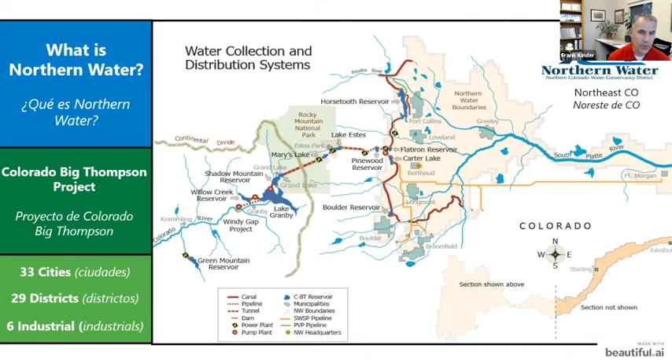In the last 3 years, we've launched a variety of services in support of what we're doing today. We have a campus here in Berthoud where you can come see wise water landscapes. We provide consultations to HOAs, businesses, and municipalities - if you're in a community that could use our consultation service, which is free of charge, we welcome you to reach out to us. We also provide irrigation audits to establish a benchmark for water use in existing landscapes. Further, we can also help with future landscapes and understand ways to maximize designs for low water use.

We have some tools available on our website under fact sheets and tools. We also provide grants to transition high water use landscapes to low water use and provide ecosystem services to support pollinators and other species. We're also helping cities plan for efficiency - there's a lot of growth in the region, and we want to be as responsible as we can with that growth to maximize water efficiency, considering the drought we're in. Training and events are one of our feature services, like our program today. We also provide an annual conservation fair, generally in the summertime - once COVID is over, we welcome you to attend. It's generally in June. Finally, we run a weather station network of 23 stations in the region where we provide details to people who are providing irrigation in the most efficient format, watering to ET or below.

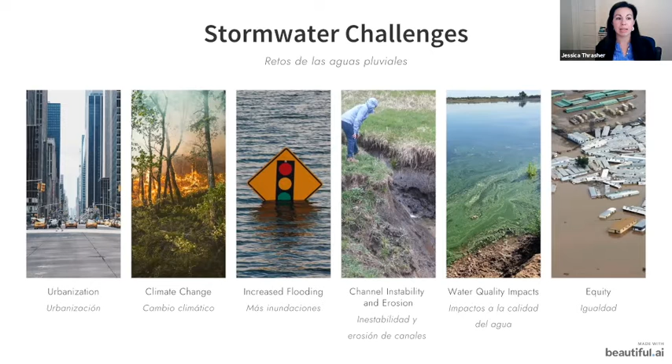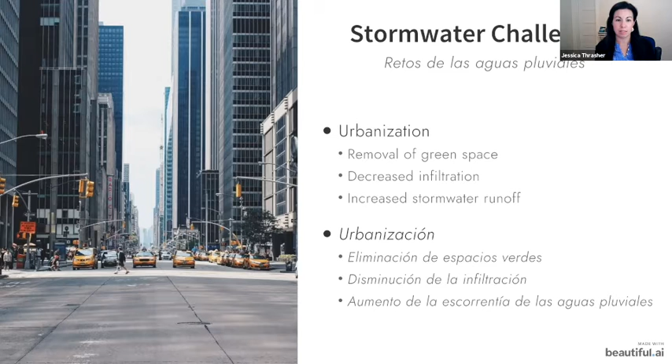The reason why we're having these increases in stormwater is due to urbanization, or the paving over of our landscaped areas as our cities expand. This has caused a lot of issues, including the removal of green spaces and decreased infiltration. When vegetated cover was present beforehand, water was able to soak into our landscapes, but as we paved over those surfaces, that water is no longer able to infiltrate, causing an increase in the amount of stormwater we're seeing.

Now, those are just a bunch of numbers. So how does that really relate to you and all of us? Well, if we have a change in our landscape from 10% runoff to 55% runoff, that means we're having to deal with a substantially increased amount of stormwater.

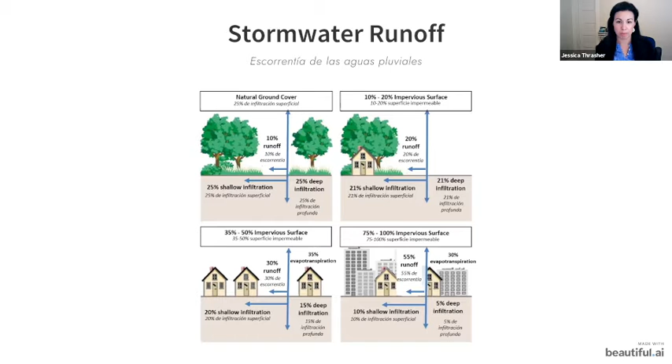You can see this in a number of ways. As we have more runoff, water hits our roof, goes through our downspouts, hits our sidewalks, and becomes dirty. It accumulates potential pet waste, oil, fertilizers from over-fertilization, and debris, all of which potentially runs into our waterways and collects in our streets, creating more hazardous driving conditions. This is causing increased pollutants in the stormwater, and we're having issues treating that dirtier water.

Additionally, one of the other stormwater challenges we're seeing is climate change. In our region, we've seen drought in a very real way this year. Drought is becoming less of an occasional event and more something we deal with regularly. We're seeing multi-year droughts now, and we're trying to figure out how to manage the amount of water we have with an increasing population and less overall precipitation.

Additionally, with stormwater, we have wildfire. The intersection of stormwater and wildfire are extremely connected. From last year's fires, I'm sure Northern Water is very involved with this and can speak at length about it. The way wildfires impact our water quality is that we're having more sediment run into our waterways. There's less infiltration because of burn areas, so increasing volumes of water run down hill slopes and into waterways. You may have heard about the Glenwood Canyon mudslides, because the burn areas received a lot of water, causing mudslides. So water and climate change are very closely tied.

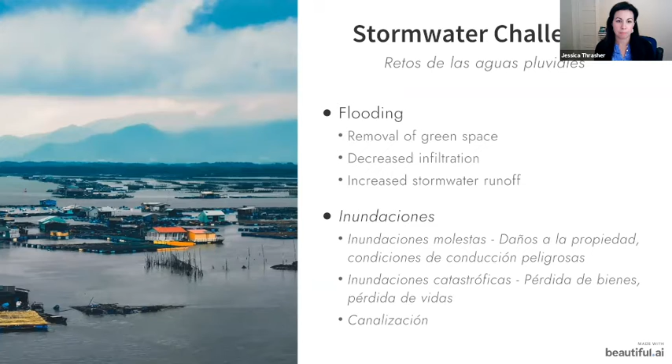We also have channel instability and erosion. As increased volume of water comes down, this cuts into our vegetated areas, making channels. As water moves across a vegetated surface, it infiltrates, and pollutants in that water are absorbed into the landscape and trapped in the soil profile, so the water that goes through is cleaner, feeding cleaner water into our groundwater systems. But with channel instability and erosion, water cuts through those layers, and pollutants trapped in the soil are re-released into our water. So then we have sediment in our water, along with the pollutants previously trapped in vegetation, lowering our water quality.

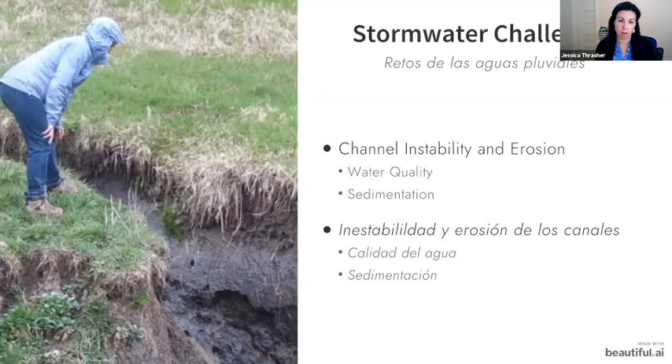As stormwater moves across surfaces, it picks up trash and debris, potentially E. coli from pet feces, and deposits it into our waterways along with fertilizer. This can lead to issues around algal blooms, which can pose hazards to human, pet, and aquatic health.

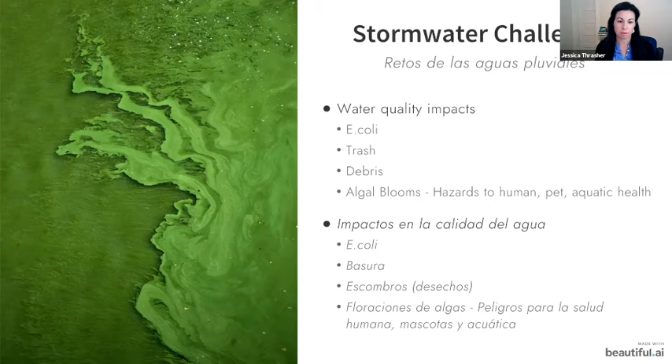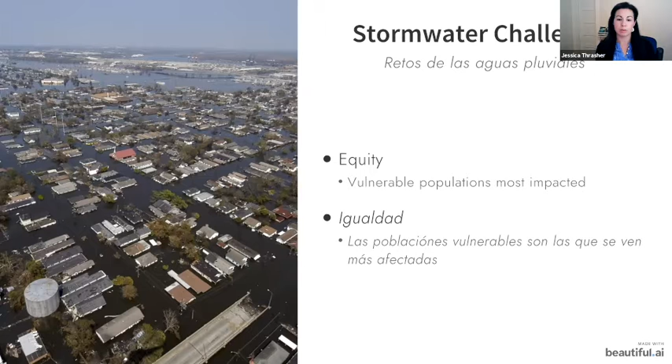Finally, stormwater challenges around equity. As we see more climate changes and increases in flooding, the vulnerable populations we have are the most impacted. So as we figure out what to do about our stormwater challenges, keeping equity at the forefront and ensuring we're installing sustainable infrastructure that elevates these communities is of paramount importance.

So what has stormwater management looked like in the past? I'd like to start with the ways we view stormwater. What does stormwater mean when you think about it? Looking at this graphic, the way stormwater has been treated in the past is really that it needs to be removed from properties as quickly as possible.

And there were good reasons for this. You don't want water sitting against foundations. As water collects in urban areas, it poses issues of flooding. But it's also been seen as a waste product, and not really something we can utilize to our benefit.

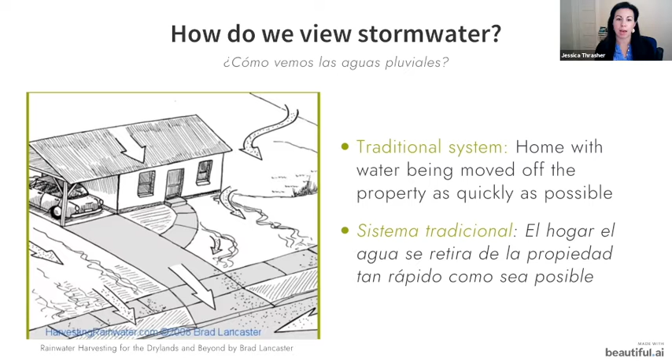Stormwater management has really been isolated. You're looking at this issue in a silo, not connected to other municipal areas like water conservation. Really just looking at stormwater as: how can we reduce the amount of water sitting in our streets, and how can we get it away from our community as quickly as possible?

I'd like to talk about what gray infrastructure is, since we're talking about green infrastructure today, so we can make that contrast.

Gray infrastructure, if you're thinking about it, really starts at the top. Let's talk about a roof line. A roof line doesn't have a pervious area, so water runs off the roof into the downspout, as you can see in the picture on the left, and then onto a curb, then onto our sidewalks and parking lots. This is all just running directly through, into our curb and gutter system.

Many of you may have also seen these illustrations that say no dumping, drains directly to the river. A lot of times our stormwater goes from the roof directly into these storm drains, which go to our rivers and streams. So what we mean by gray infrastructure is that there is no vegetation allowing infiltration to happen. It's all concrete, all hard surfaces. Infiltration is not able to pass through gray infrastructure.

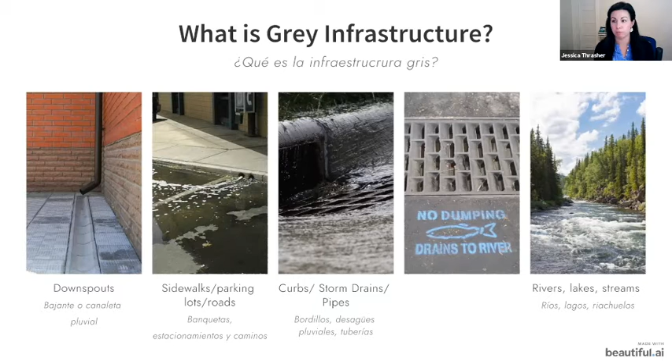The extended detention basins settle out pollutants. They slow water down and collect it in the basin so the pollutants can drop out of the water through a process called sedimentation. Typically, the extended detention basin holds water for about 40 hours and then releases it through the outlet structure.

The third in our series will talk in depth about extended detention basins. Since these are the most common type of stormwater management you'll find in Colorado, if you're an HOA, a landscaper, or even a regular citizen, you're seeing these—and if you're an HOA, you probably own one, and if you're a landscaper, you might be maintaining one. Knowing what they look like, how they function, and how to keep them working their best is really important, so I'd highly encourage you to attend our final session.

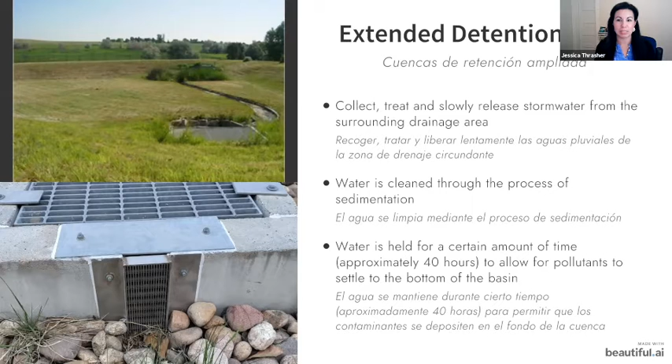Before I move into green infrastructure and go in depth on what that is, I'd like to pause for a moment for any questions. You can put those in the chat or unmute and ask me directly.

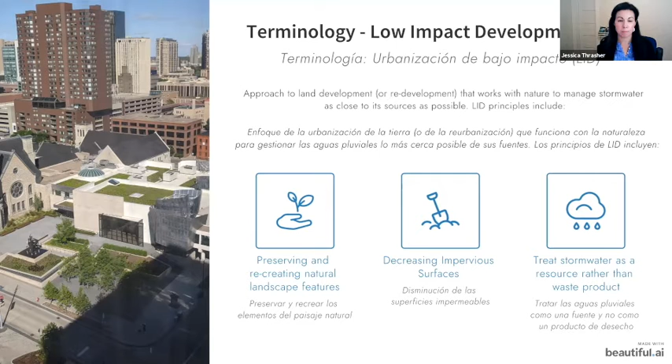Low impact development is an approach to land development that works with nature to manage stormwater as close to its source as possible. These principles include preserving or recreating natural landscape features, decreasing impervious surfaces like sidewalks and parking lots, and treating stormwater as a resource rather than a waste product. These are the philosophies of low impact development.

Green infrastructure refers to the systems and practices that use or mimic natural processes, including infiltration, evapotranspiration, and reusing stormwater runoff where it is generated. Because of these two definitions, you can see why they're used interchangeably.

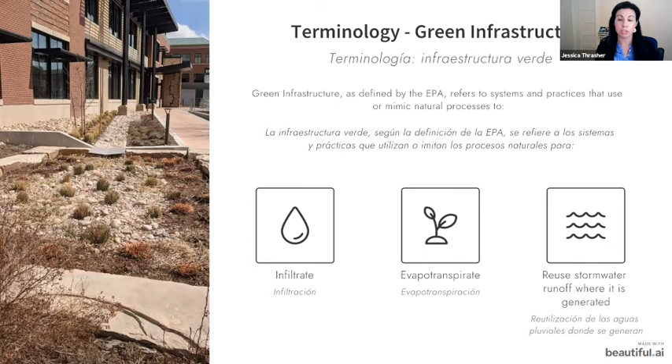You can also use green infrastructure in combination with more traditional stormwater elements, such as having a rain garden but also having stormwater pipes.

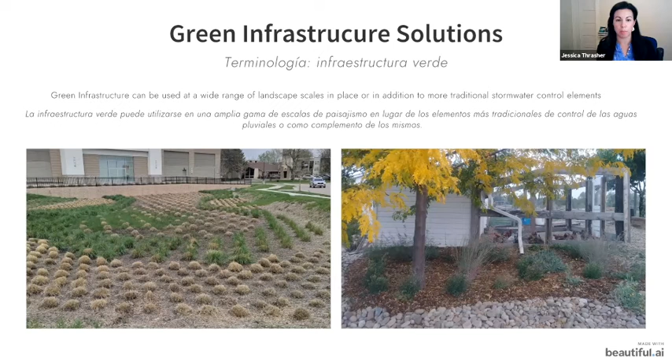Green infrastructure also looks at the intersection of multiple elements. How can we have infrastructure that improves the quality of life of our cities, but also protects the environment and has economic benefits? So it's really looking at the triple bottom line effect.

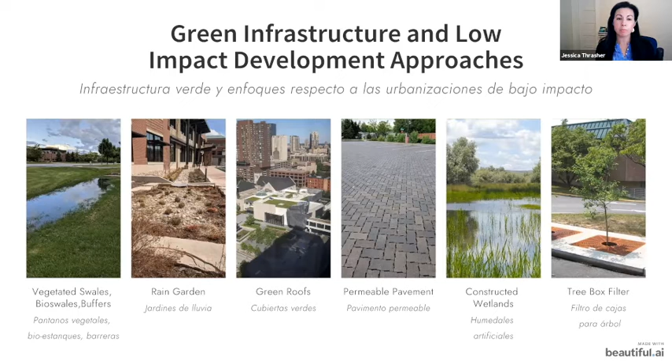Today I'm going to talk you through some different types of green infrastructure and give you a very brief overview of each of these different technologies.

To start with, the vegetated swale, which is an open channel to allow stormwater to infiltrate. These are often seen next to parking lots. They are a U shape instead of a V shape - the V-shaped channels you see are actually for irrigation, but that's not what this is. A vegetated swale is to allow water to infiltrate.

Instead of a curb and gutter, the water would just go from the parking lot or roadway down a slope into that U shape, so that water can sit there and move slowly, allowing infiltration to happen as it moves along that channel.

It reduces your runoff volume, so there's less water going into the storm drain, not causing flooding issues. You have better water quality because that water is soaking into the ground and being purified as it goes through the soil profile.

You are having additional green space available, which has multiple benefits. This can be used in your community when it's dry - it's just this vegetated area, enabling people to have more access to nature.

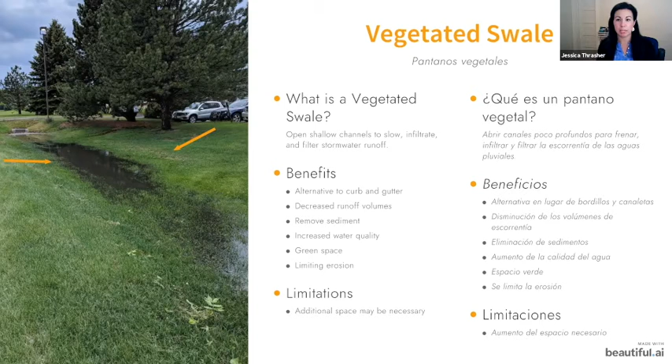The difference between a vegetated swale and a grass buffer - I'll go back for a minute here - the vegetated swale is narrower but longer, with that U shape, and the grass buffer is wider and flat. That's the difference between the two.

It has the same benefits of removal of sediment and pollution, increased infiltration. You get that green space again, and also break up that impervious area where water just transfers from your roof to the sidewalk, to the parking lot, to the storm drain. You're increasing your ability for water to infiltrate.

Again, the limitations are increased space requirements, and you might need an underdrain.

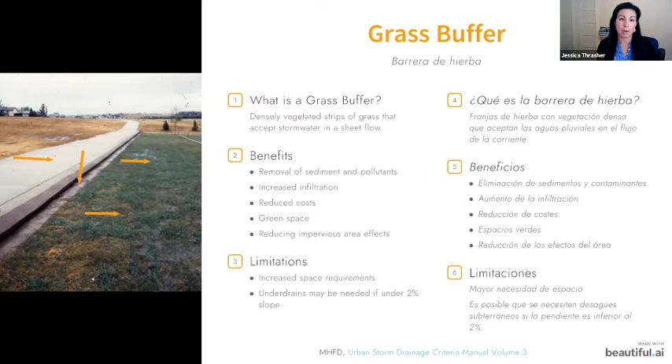Next, a rain garden. A rain garden is a landscape depression designed to slow, capture, and infiltrate runoff. I could talk all day about rain gardens, and in fact I will for our next session, so this is just a brief introduction.

What's really beneficial about rain gardens is you're using stormwater as a resource. You're taking it as it comes from your storm drain and enabling it to infiltrate, where it can double as a benefit to your landscape. You can water your own landscape with the stormwater, so you're getting two benefits in one, actually three, because you're also purifying the water. So you have reduced irrigation needs, reduced runoff, and you're treating that water.

So if you're doing planning for projects, by having rain gardens and this type of green infrastructure, you can check multiple boxes for incorporating this type of strategy.

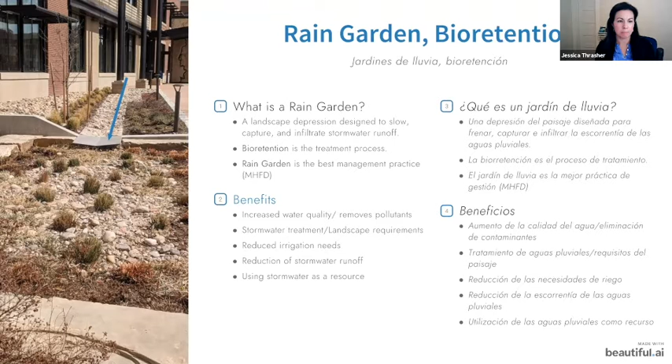Additionally, with rain gardens, you're able to have those multiple benefits. I just lost my train of thought there—sorry, I'll come back to it.

Some considerations for rain gardens: the vegetation does have to be established. Once established, you don't have to water a rain garden because it's based on planting native plants that are acclimated to the drought and rainfall we get.

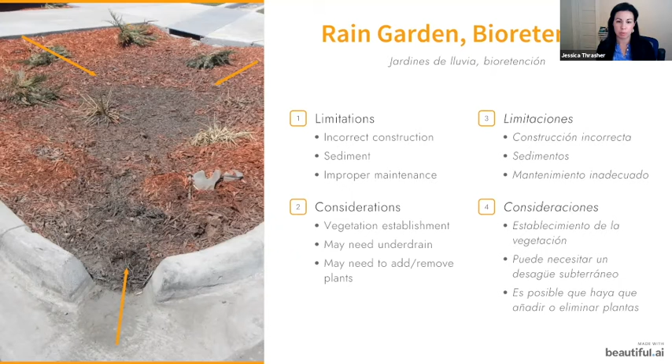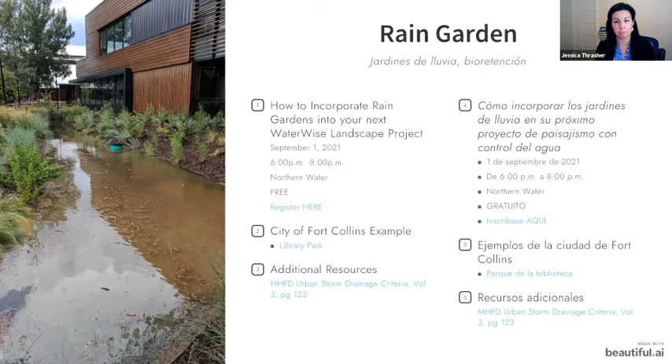There are two different types of green roofs. One can be extensive.

These are about 30 pounds saturated and 4 to 6 inches. These are the best for retrofits because they're lighter.

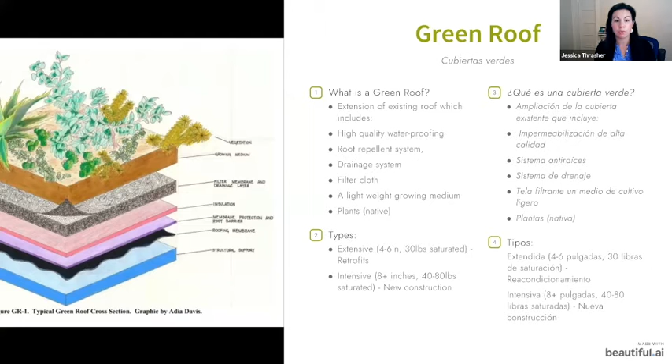The next type is intensive, and these are deeper. They are over 8 inches and 40 to 80 pounds saturated. This type of green roof is best combined with new construction because they need additional supports in place.

As with our other strategies, green roofs reduce runoff. They have the additional benefit of reducing heat island effect. These are very effective in cities where you don't have a lot of additional space to add in vegetation.

Since you already have all of your parking lots and sidewalks, utilizing the existing roofs is a really great way to reduce your heat island effect without having to have that additional space, since it's so costly to have that additional landscape area in cities potentially.

You're also insulating your roof, so you're having a lot of energy savings, which can get you LEED credits. It could potentially extend the lifespan of your roof. And as I mentioned, there's no extra space that you need since you already have your roof in place.

Some of the limitations with the green roof: it could potentially have high installation costs. But I do want to say that the life cycle cost could be lower. So when you're looking at the cost estimate, looking at that life cycle cost is really critical. With some of our green infrastructure, the upfront cost could potentially be higher, but over the life cycle of that infrastructure, they are lower overall.

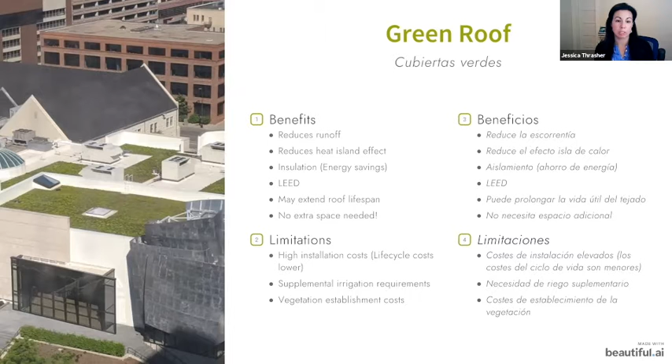Next, we have permeable pavement. Permeable pavement allows water to soak and infiltrate between these pavers or between the layers of that material. There are 3 different types: pervious concrete, porous asphalt, and the third type is permeable interlocking concrete pavers, or PICP, which is pictured here and is the most common in Colorado.

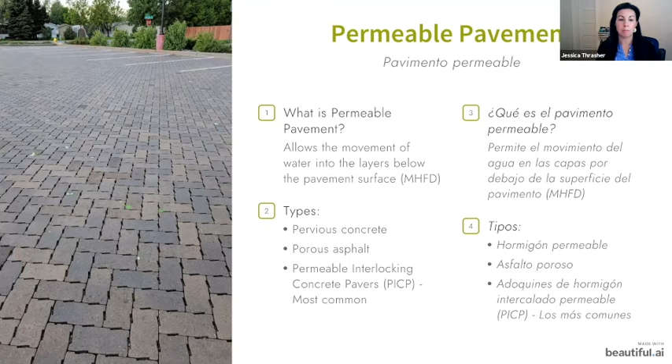The benefits of this one are it serves multiple purposes. Once again, if you're in a city where landscape real estate is at a premium and you need a parking lot but don't have room for a large grass swale, by having the permeable pavement you can have infiltration, clean the water, and have your driving surface as well.

Having permeable pavement helps alleviate drainage issues because it's soaking in and not just sitting on top of that pavement surface. Because it's infiltrating, you can have benefits to nearby tree health because they're getting that additional water as it soaks into the ground.

There is not typically an ice issue on permeable pavement. We get ice when the snow melts and then it sits there and freezes. But with permeable pavement, as that snow melts, it soaks right in. So this is a really great strategy for not having ice on your parking lots. Again, you can get LEED credits for it, and this type of strategy can be used in combination with other LID practices.

Some limitations are they're not for use near sparse areas of vegetation, where you could potentially have a lot of erosion happening and a lot of sediment running through your stormwater and ending up on your permeable pavement, because a lot of extra sediment will clog your system, your permeable pavers.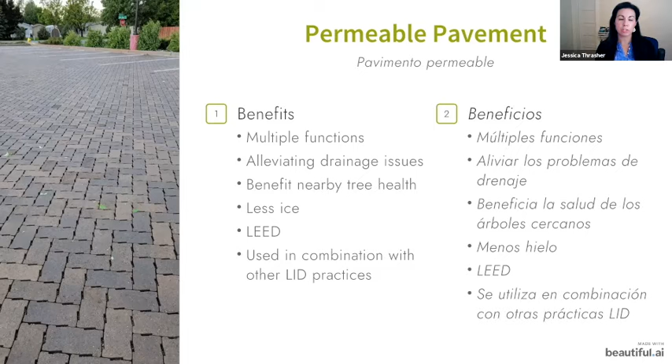The best pattern for permeable interlocking pavers is the herringbone pattern, because it offers greater stability and you won't have issues with movement of your bricks. By using these two strategies, you can really extend the longevity of your permeable pavement.

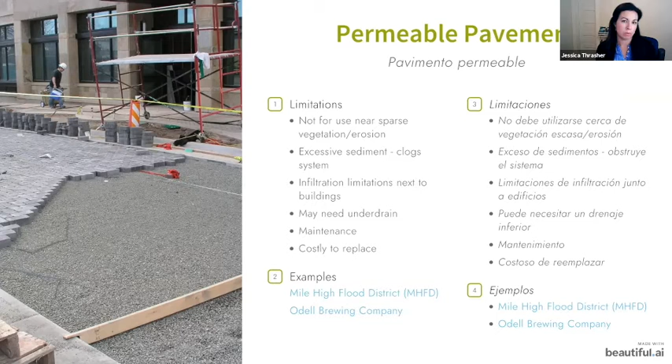The next strategy is constructed wetlands. A constructed wetland is a retention pond that has water consistently, and it's slowing down the runoff so that pollutants can drop out. This is artificial—constructed by us, not a natural wetland. It's a stormwater feature designed to clean the water, but it's also a natural feature, so you get habitat, wetland plants, and a lot of the natural benefits as well.

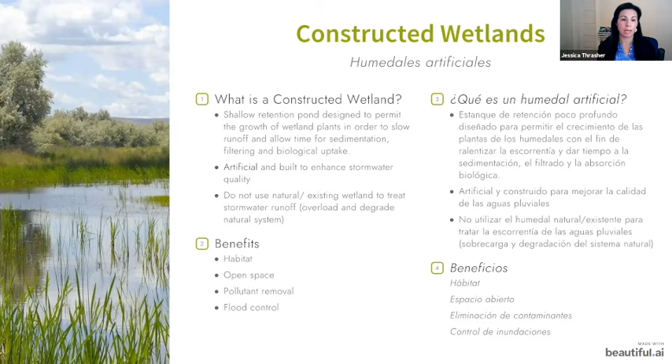But keep in mind these are not a natural feature—they're designed to collect pollutants, which eventually need to be cleaned out. Additional benefits include open space. COVID has really shown us how important the outdoors is and how critical access to open space can be. So with this stormwater feature, you get stormwater quality protection as well as open space and flood control.

One limitation, and why we don't typically see many constructed wetlands in Colorado, is the water rights issue—you need to obtain a water right to construct one. These can have debris in them, and algal blooms can be an issue. Since these features are trying to clean the water quality, one issue we see is nutrients from waterfowl adding contaminants to the water.

Constructed wetlands typically need to be cleaned out every 15 to 20 years. When that happens, you have to dredge out the bottom to remove all the pollutants that have accumulated over time. This should be done during winter so no endangered species are impacted, and with minimal impact to the vegetation, since there will be some reestablishment after cleaning. Still, 15 to 20 years is quite a long lifespan.

Some considerations for constructed wetlands: they need to be designed for maintenance so you can get the correct tools in to maintain them. Otherwise, it's going to be very expensive and difficult to clean out when that time comes.

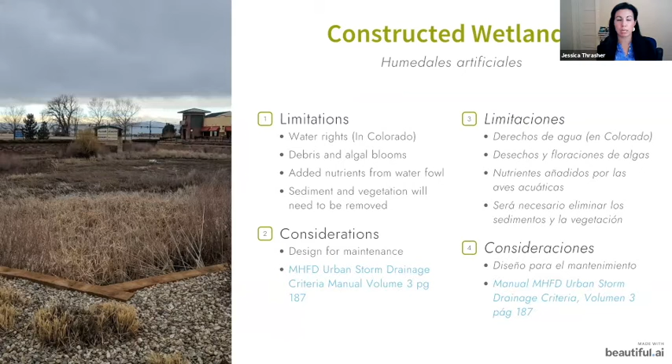The next strategy is a tree box or tree filter. This acts very similar to a rain garden—it's collecting runoff, typically next to a roadway or sidewalk, and treating it before putting that cleaner water into a storm sewer system. Pollutants are removed as it moves through the filter media, and you can fill it with different types of media to remove a particular pollutant if the area being treated has a specific issue. You're also adding to the tree canopy and the benefit of additional trees into your urban and suburban areas.

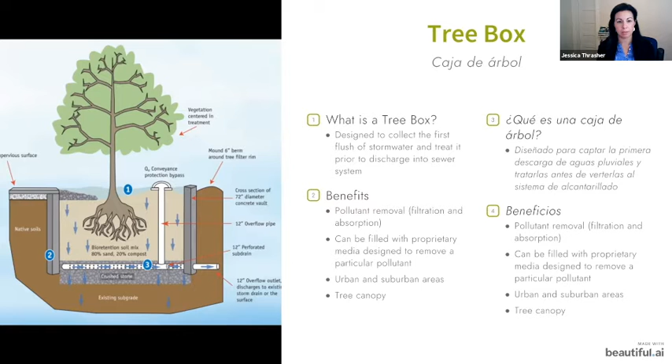Any of the water that enters into the tree box is then required to go through the filter media down to the under drain at the bottom, where the purified, cleaner water will go into the storm drain that it's connected right next to.

This is really to treat small stormwater volumes, and you're also dealing with a tree. So you need to have an arborist come out to potentially check this tree, or that tree might need to be replaced if there's some issue with it living, or if it has some infestation issues.

When you're choosing a site for your tree filter, choose a site based on whether the pollutants can be treated with a tree box. If there are more smaller, frequent storms, and a smaller drainage area, these would be good choices for having a tree box. For larger sites, you can have multiple tree boxes together, but that might not be the most cost-effective solution. So look at other green infrastructure solutions that might be paired with a tree filter, so you could do a more cost-effective strategy potentially.

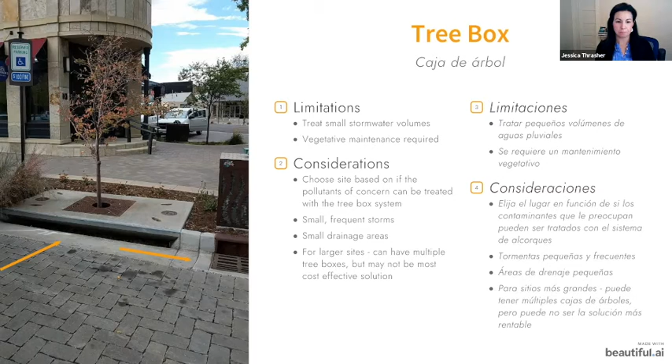There are numerous benefits of green infrastructure and low impact development. As we've talked about multiple times, we get groundwater recharge. When we see storms and stormwater events where the water is not able to infiltrate and goes directly into our rivers, we get a spike in river flow, and then that water disappears. But when we're able to infiltrate water into our groundwater, that water still makes its way to the river, but slower.

So really, that groundwater is acting as our storage area, keeping our river water there for longer. We have decreased heat island effects with our green infrastructure strategies, potentially lower energy consumption, especially with our green roofs, and reduced flooding—either nuisance flooding, or helping alleviate some catastrophic flooding when paired with our stormwater infrastructure that's already in place.

We're looking to manage stormwater as a resource, not trying to get rid of it as quickly as possible, but looking at stormwater as something of value that we can use to benefit our communities. We're looking to stack functions—how can green infrastructure help build our communities, help build our economies, and also protect the environment? By treating and managing stormwater as that resource, we have decreased demand for irrigation, especially when pairing that with something like a rain garden, and we enable our communities to have increased access to nature.

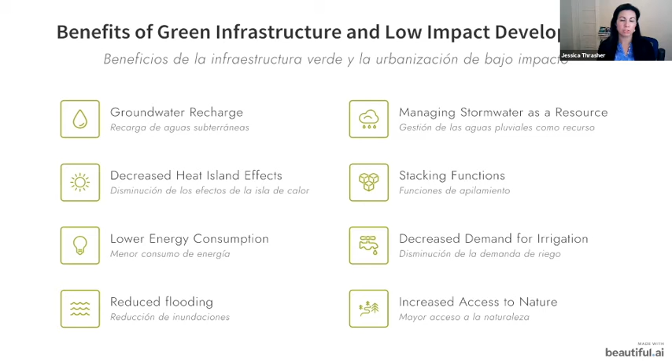So there are, again, numerous benefits to green infrastructure and low impact development.

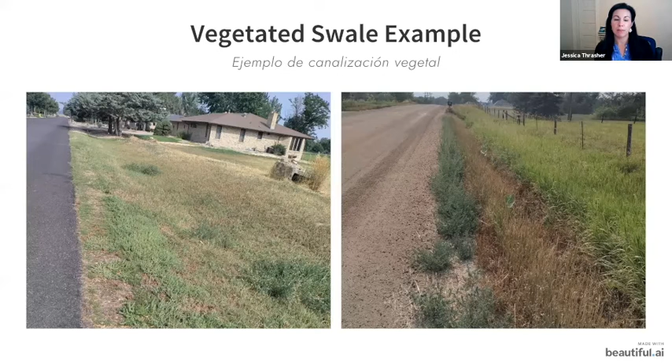Another great example of a vegetated swale is on the right picture, where those native grasses have not been mowed, and this is on a dirt road. From the dirt road, you're going to get more sediment going into that vegetated swale, but that swale is very healthy. That water is infiltrating. There are no drainage issues on this road because of how healthy that vegetation is. It's able to uptake that water, move it away from the road, and infiltrate it into this very healthy system.

There are other homes that have been using plants in addition to rock, just to set the stage. I know this is a lot of pictures, but I wanted to make a point. The one on the far left was the first picture I showed you of what a vegetated swale should look like - the term vegetated, right? It needs to have vegetation. Looking at the next picture, this was supposed to be a vegetated swale. You can see it has that same shape, angling in from the road, but that is all rock.

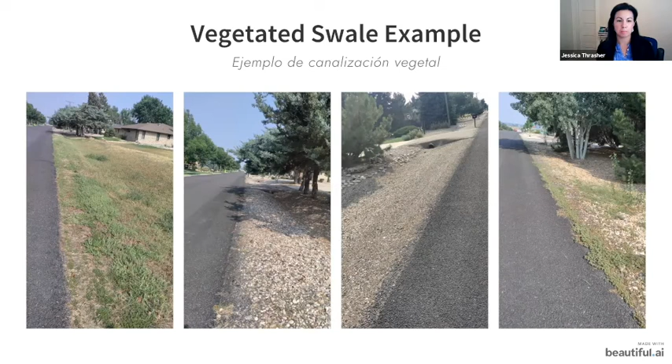Okay, the next example, here are some rain gardens in Fort Collins again. The left-hand side is a street rain garden, collecting runoff as it runs down the street. Instead of going into a curb, it's infiltrated right next to it, allowing traffic to be slowed down in that area, plus the added benefit of vegetation slowing down the rain garden.

So that's what a rain garden looks like when it's full. The next picture is after the storm, and you can see a lot of buildup of material - a lot of movement of debris and sediment moving down our roadways. This shows in a really real way the need for our water to be cleaned before it hits our rivers and streams.

This middle picture shows that you need to clean that before the next storm, because otherwise it will not function as it should. The water will not be able to get into this rain garden because of sediment buildup right where the water is supposed to enter. So this illustrates how well this rain garden can work when it's being maintained properly.

The next picture shows that if it's not being maintained, it will not function at all. So while we're thinking about where to install our green infrastructure, we also need to talk about how we can make sure these are designed for success, so that they continue to function as they should and provide all the benefits they can bring us.

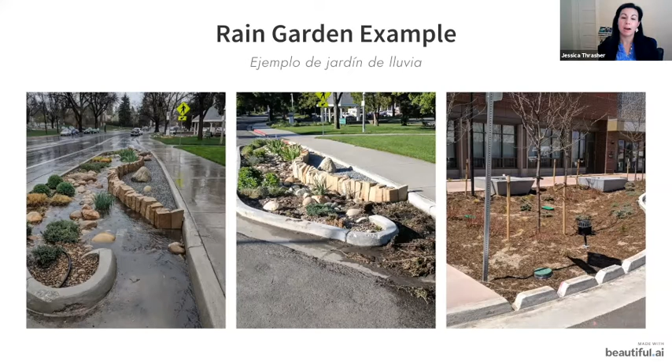These are examples of rain gardens not working. The picture on the left, I showed you earlier, failed because it was planted in this bowl form. The picture on the right - how could you even tell that was a rain garden? It looks like rock, because the inlet wasn't letting water in appropriately, and the appropriate plants were not selected. This rain garden never got a chance to be successful because it wasn't set up for success in the first place.

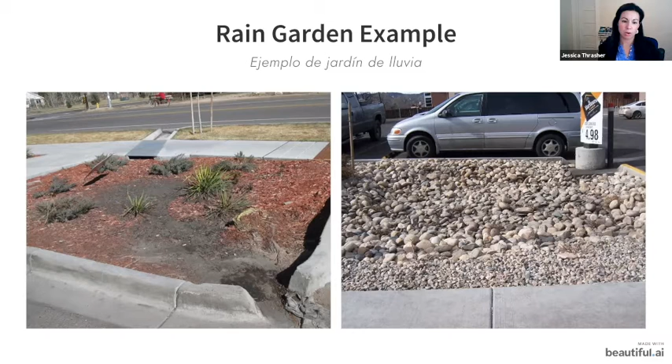Additionally, it's really better to use mulch instead of rock in rain gardens, because mulch helps build up the soil, whereas rocks require cleaning out the sediment that accumulates in them, don't break down or help the soil, and also add heat to the plants, making it harder for them to survive. So these are things you don't want to do with your rain garden.

Here is a permeable pavement example, showing how permeable pavers can be installed. They're in that herringbone shape, which gives really great structural integrity. And on the far right, you can see there's no ice on this - as the snow melts, it goes right into the infiltration layer and doesn't cause ice buildup on your parking lots or walkways.

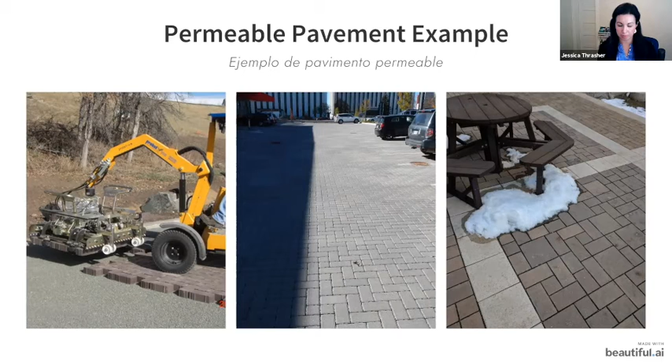Here is what it looks like when it's not functioning. When you see this buildup on the left-hand picture of tree debris, like leaves, on top of your permeable pavers, that is when it's not infiltrating. Permeable pavers are supposed to infiltrate water at 20 inches per hour.

If we were in person, I would ask anyone what they thought a typical rain event in Colorado was. Anyone? I would call on someone, but typically, if we had a 3-inch storm, that would be a huge storm for us - so a 3-inch storm versus 20 inches per hour. Permeable pavers should be able to handle whatever storm we get in Colorado typically.

So when you see water sitting on top of permeable pavers, like in this example on the left, you know it's no longer functioning how it should, and that filter material is clogged. Permeable pavers don't last as long when you have a lot of tree cover around them, because that's how they get clogged. That's one of the reasons why these permeable pavers failed on the left - debris accumulating on top, pollen, leaves, and that sort of thing.

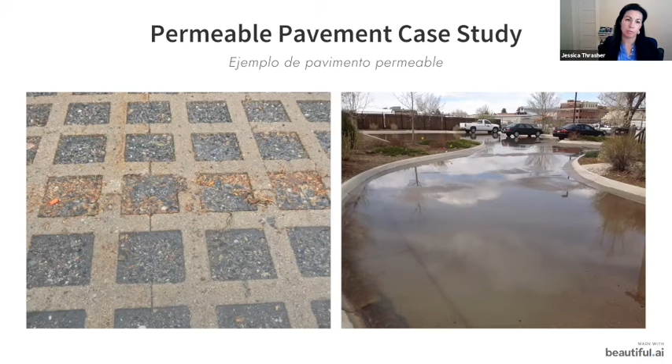Before I move on to some barriers, are there any other questions on some of the examples I shared, or things you've seen with green infrastructure as you're driving around?

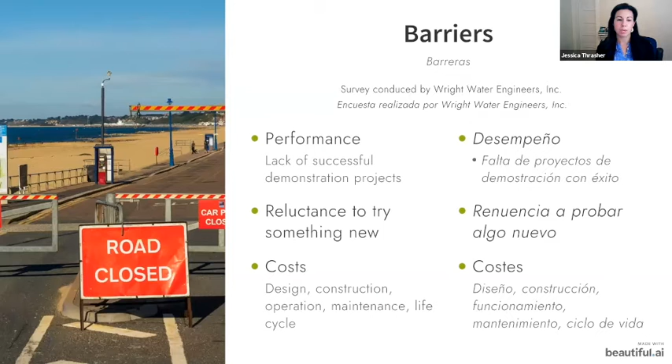Additionally, costs. There is the idea that the design, construction, operation, maintenance, and life cycle costs are potentially higher with green infrastructure than gray infrastructure, which is not necessarily the case, but that is the perception — that the costs could be higher or the costs are unknown, whereas with our gray infrastructure, those costs are known.

Maintenance requires new techniques and training. Contractors already know how to install curb and gutter systems, getting asphalt and concrete put in place, but knowing how to install green infrastructure, as with the rain garden, if you do not install it correctly, it will fail. So there are concerns around knowing how to maintain and install these strategies.

Codes and ordinances can also be an impediment, where low impact development is recommended rather than required. So we have a lot of work we could do in making green infrastructure and low impact development strategies, maybe not necessarily required, but more than just recommended.

Additionally, there may be other types of stormwater infrastructure required even if you install low impact development. A lot of times they work really well together. So there's hesitation to install green infrastructure strategies because the thought is, well, I have to install gray infrastructure anyway, so I might as well just keep with installing only gray infrastructure.

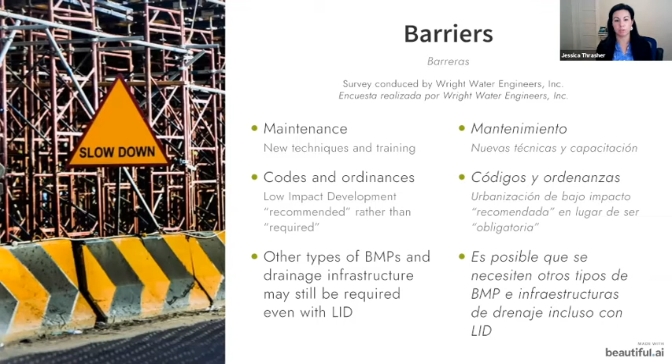So what should we do about that? How can we address some of these concerns?

Additionally, the Mile High Flood District is organizing Chapter 4 of the Urban Storm Drainage Criteria Manual, and I've heard they're using an increasing number of pictures and case studies of these solutions working in our area as well. That chapter should be out in 2022, and I look forward to seeing all of those great examples.

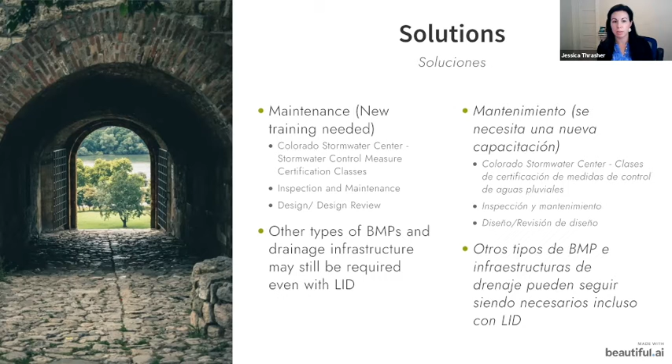There's also the issue of other types of infrastructure still being required with low impact development. Yes, that is still a legitimate concern that could be necessary for your area. But as we move forward and think about designing our communities for sustainability, it's not only about installing one type of stormwater infrastructure - it's about how we're making our communities more sustainable, how this infrastructure will serve us in future years, and how we'll be more climate resilient. So yes, that is a concern, but I think we can find a way around that.

When looking at these policies and regulations, I've already mentioned the expedited review process. There's also a lot of cost sharing grants if you're looking to install green infrastructure, or recognition programs for communities and developers that are doing it right - that helps them. But I really think, as far as developers and contractors go, reducing fees and expediting the process are two really great strategies we can use in our land use development moving forward.

So here are just some examples looking at what gray versus green infrastructure looks like right next to each other. Here are inlets, this is where the water is coming in. We're looking at how quickly stormwater is moving from its source to the river.

Here we have the rain garden inlet. You see how the water is being slowed down and infiltrated. The next one, you see a vegetated swale where that water is moving across the vegetation and infiltrating. And then you have a traditional stormwater inlet and curb system where that water is being directed to run off into the drainage area as quickly as possible, into the pipes and then into our rivers.

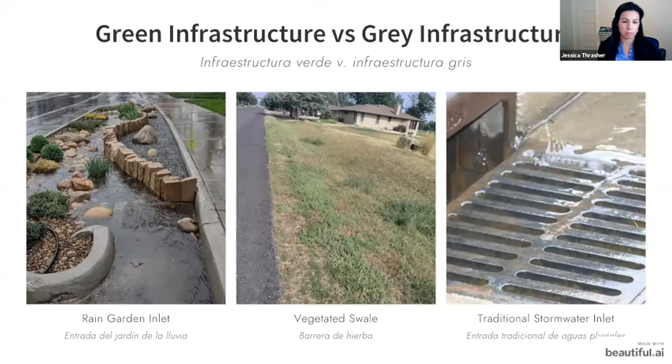Here are some examples of planters in our cities, beautifying our streets. There's been a lot of work around that in Fort Collins and Denver areas and other communities as well. But as you can see, beautifying your streets can also look like a below-ground planter, which is a rain garden. You're wanting to add more vegetation, but also having that dual function of purifying our water and reducing our amount of stormwater, versus the one on the right, which is an above-ground planter. You're having to water that planter using additional water resources, especially because it'll get drier since it's elevated. You're having to water it more frequently, and you're not getting any additional benefits of purifying the stormwater.

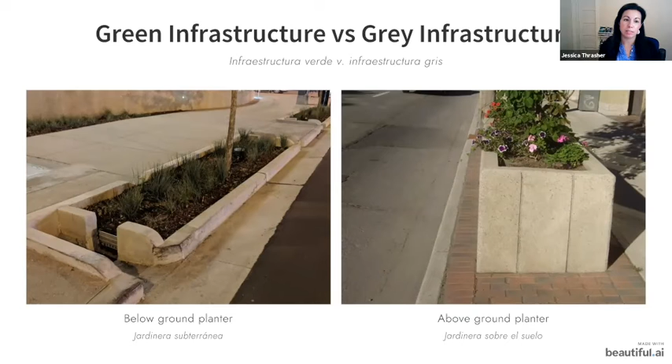This one isn't exactly a fair comparison, an extended detention basin versus a constructed wetland, but they're both removing pollutants by slowing the water down. There are limitations around having constructed wetlands in Colorado, but this really is just showcasing that stormwater infrastructure can look different than it has in the past. What are the opportunities that we have to have more green infrastructure in our communities?

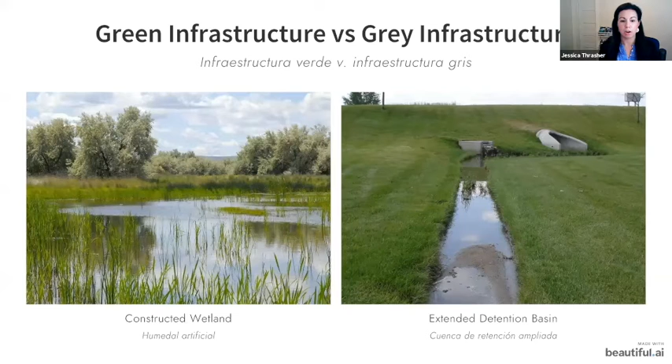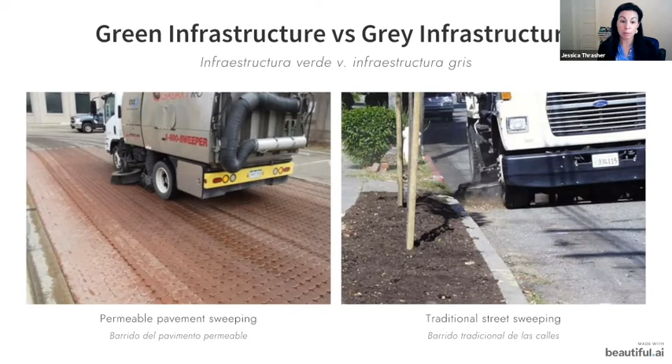Here is an example of permeable pavers being cleaned, and then traditional road sweeping. If we're installing these green infrastructure strategies, but we're already doing some measures to clean our streets, it isn't a very large jump to go from street sweeping on a regular basis, which protects our stormwater, to doing regular maintenance and sweeping of our permeable pavers, especially when you already have those trucks and that infrastructure built in.

So what now? What is the perfect solution? Should we have all green infrastructure? Should we rip out all of our gray infrastructure? No, that's not what I'm saying. I'm not saying that all gray infrastructure is bad or that we should only have green infrastructure. But we really need to look at how can they work together. How can we incorporate, as we're moving forward, more green infrastructure solutions rather than just saying, okay, we have a new development, let's just put in gray. Opening up that conversation to allow more discussion about what are the benefits that we can get.

Additionally, one of the other solutions and mindsets is a one water approach. This mindset looks at all of our water sources: how do they work together? How can we have multiple benefits, economic, environmental, and social? It's a real systems approach to our water instead of having water looked at in silos. The water conservation folks don't talk to the stormwater folks, who don't talk to our wastewater folks. We really need to start breaking down those barriers so that we can talk to each other and have this integrated view of our water systems, especially in light of the drought that we're encountering and our reduced ability to have our water resources.

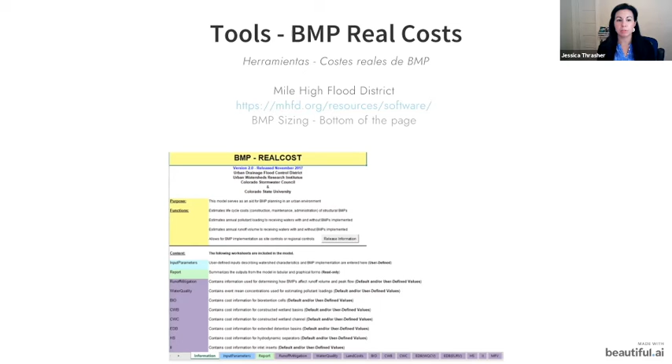Since floods are very real in our communities right now, and we're much more likely to have large flood events after a fire, the Navigate the Flood resource is especially relevant at this time. This resource is also free, as are all of the resources I'm sharing with you. It will help you look at how resilient your community is, what challenges it might have, and help with the vision and goals for your future, then choose what community solutions would be best, and put that plan into action. Navigate the Flood is part of the Tap into Resilience toolkit, one of many tools at your disposal for moving forward.

The final tool I wanted to highlight is the Equitable Infrastructure Toolkit. As I mentioned before, our lower income areas and vulnerable populations are hit the hardest with climate change, whether from extreme flood events, fires, or air quality. As we move forward in making our communities more resilient, having that focus on equity is really critical. This toolkit talks about all the ways you can incorporate equity into your future planning. This is by the River Network.